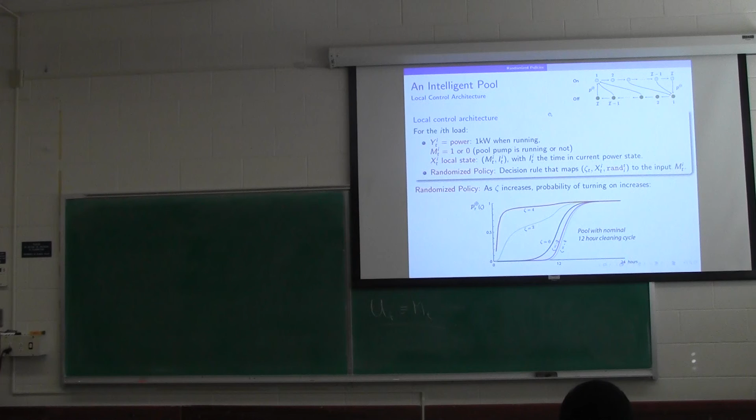I think we're recording now. Oh, we're recording now? Okay. 32 gigs. All right. Thank you. So what did we miss? Not sure. I think we're good.

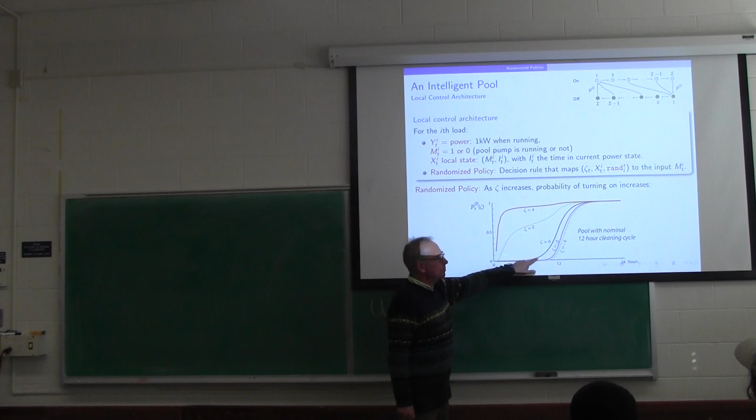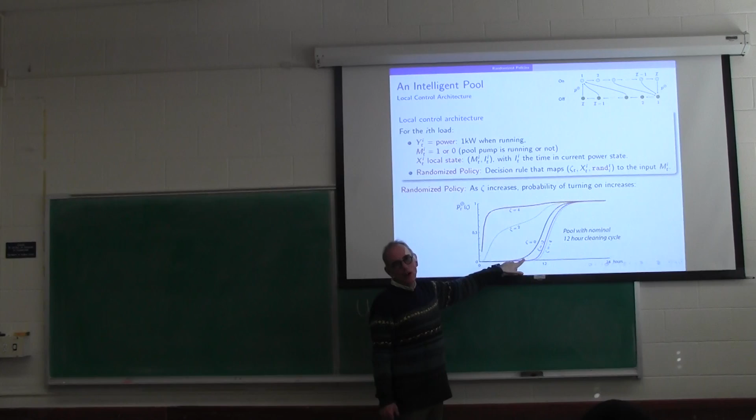Okay, well anyway, I'm sure I was blabbing on about that being a Markov chain. But here's a big step that you can't forget: we're imposing that the nominal behavior is random. Nobody has a random pool. Like I said, it's Markov, but it's deterministic. You've got 8 hours of cleaning, 16 hours idle. In my case, it's 12 hours on, 12 hours off. I'm going to impose randomness.

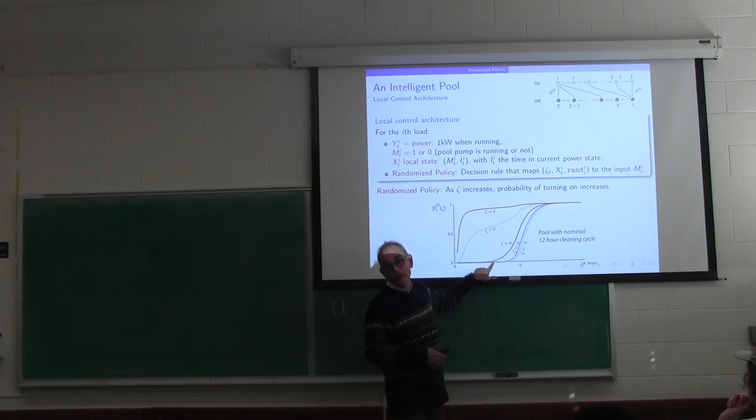So instead of deterministically turning on after 12 hours, after, say, 6 hours, there'll be a small probability of turning on. There'll be a probability of half of turning on at 12 hours, and then a small probability that I'm still off after 18 hours. Now, that's quite a lot of slack. You're allowing anything from 6 hours to 18 hours of cleaning per day. Why not? Who cares?

Do you think anybody cares? This is all to keep algae from growing and stuff. If you have 6 hours one day and 18 hours the next, it's just not going to affect anybody's quality of life. And if it does, then I'll modify it. If some algae specialist tells me that this is too broad, then I'll move it over. Big deal.

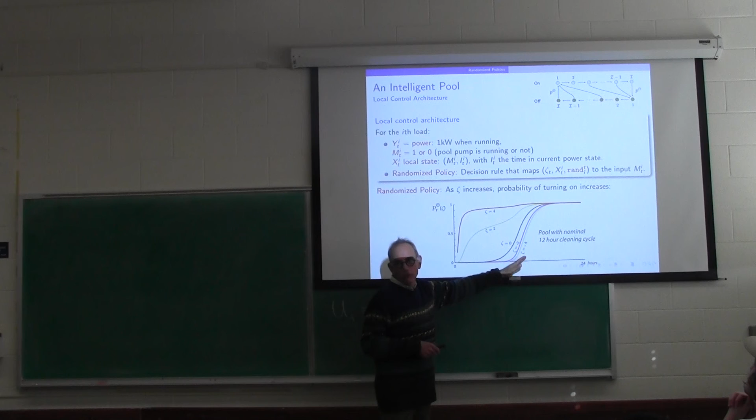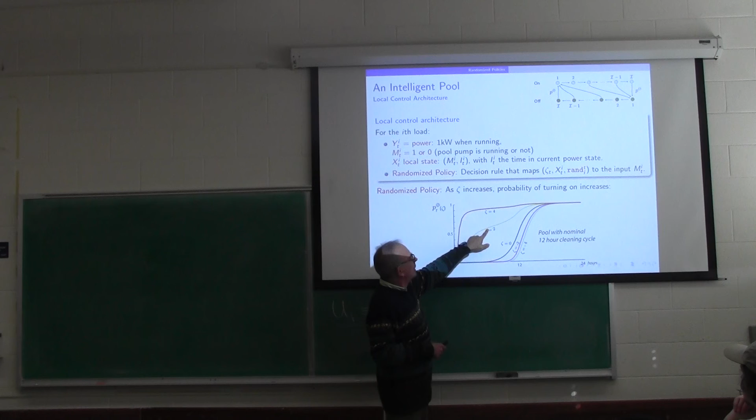So then basically, you construct all these different switching curves depending on the value of zeta, and this is through some optimization algorithm, which I can't describe. This is the output of an optimization experiment. When zeta is 2, you can see this goes way up. There's a higher probability of turning on. And when zeta equals 4, you're basically saying, damn it, turn on. You're screaming. And similarly, it's not as extreme going this way because of the way it works.

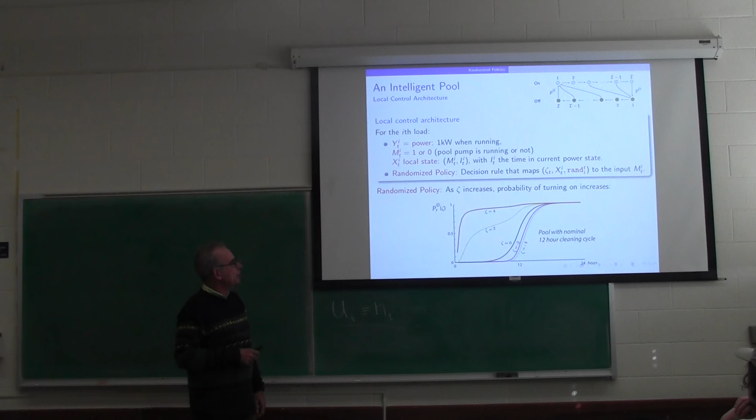So basically, when zeta is big, you're screaming to turn on, and if you're already on, you're screaming, stay on. That's what's going to happen. But again, the precise way you get these curves, I'm not going to explain. All right, so that's just an example of a randomized policy. Clear? Yeah, you could draw these curves. You could just have fun and draw curves. I'm sure it would work well.

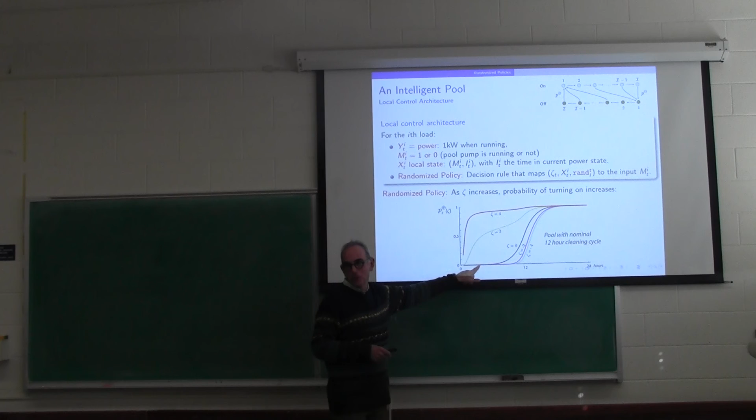And when I presented this at Berkeley years ago, Pravin Varaiya, who's been very closely involved in all this stuff, said that's fake data. And it took me so long to convince him, Praveen, it really isn't fake data. I can show you the code. He just didn't believe it. This is the outcome of an experiment with a very random system. It's just that there's feedback.

You've got 20 pools. And you have 1 over n, or 1 over 20, times the sum of the power consumption of the i-th pool at time t. And you're feeding that back. And then you have a compensator here. Now to get that beautiful tracking, what do you think we use for a compensator?

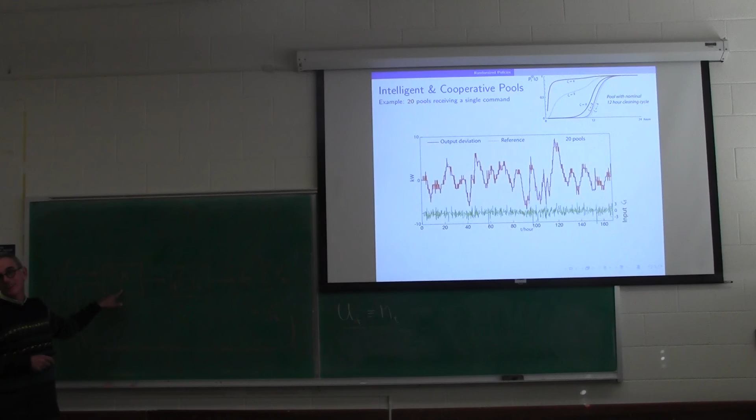So basically, we had our 20 pools, and we measured the average power consumption, which we wanted to track some reference signal, which would also be normalized. The averaging is just because of the mean field model point of view. Really, it's the sum we care about. But who cares about constants? I heard somebody say it. Yeah, integral control, just flat integral control, nothing fancy, and you get beautiful tracking, and it's robust. 20 pools, and you've got 300,000, which is less than half of the pools in Florida.

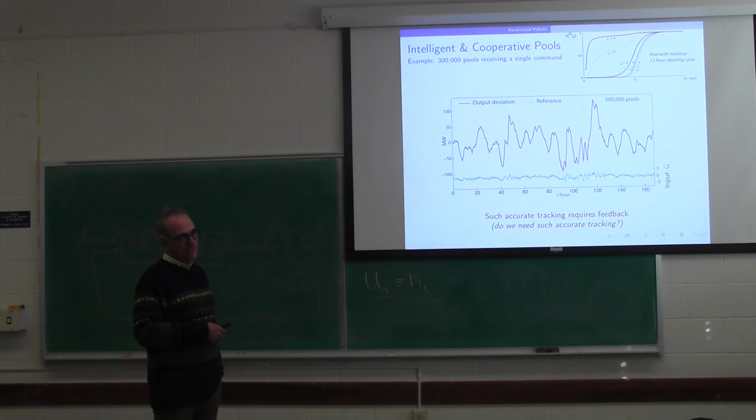It's perfect. It's too good. Nobody gives a shit about perfect tracking like that. I don't think anyone cares. No generator can do that. Batteries can't do that. Nothing can do that but loads. But nobody cares. You don't need such accurate tracking.

It's a miracle, though, isn't it? I couldn't sleep when we saw these plots. So again, you need feedback to get such good tracking, but we don't need such good tracking. So I bet you can break this loop. I bet you can get away with just one way.

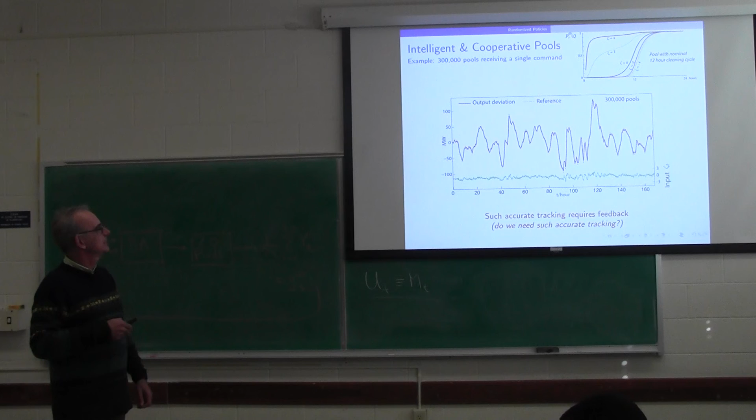So I guess how closely does that model the real pool pumps? Oh, it doesn't. Who cares? No, it doesn't matter. You see, pool pumps, the cleaning cycle of 12 hours or 8 hours is just so arbitrary. I mean, if somebody says I want a minimal number of cleaning hours per week, then you'll impose that. You'll put in another feedback loop, some other thing to make sure you get minimal cleaning.

It's interesting to point out when zeta equals 0, you've still changed the nominal behavior. Yes, and you have to. So if you kept zeta equals 0, if you made it normal like my house is today, everything would fall apart. I couldn't do this design. I couldn't get these beautiful results. I need this family of functions to be smooth, as we'll see today, and the only way to make them smooth is to create randomness in the nominal behavior.

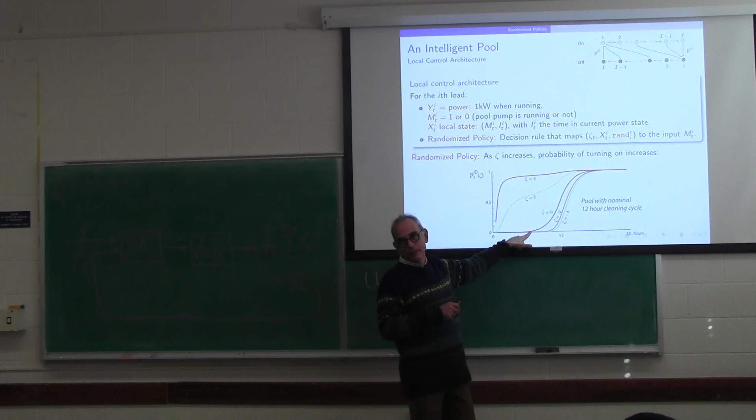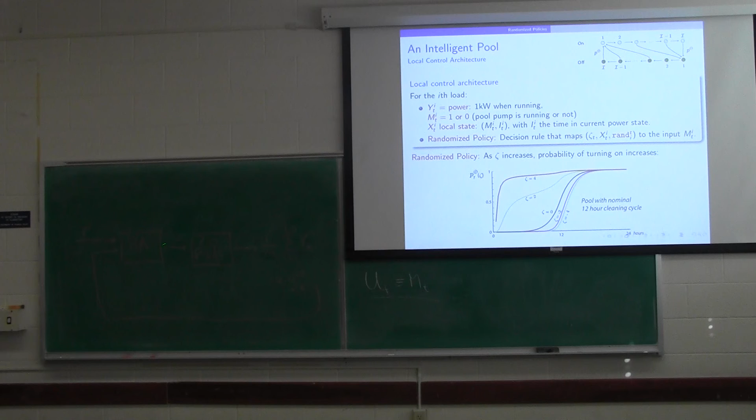I'm having trouble seeing. I get it with the pools as the plant, but what about with the grid as the plant? Are you talking about transmission? What are you looking at? Yeah, so this would be in Juno Beach, Florida, and FPL already knows every pool, and they already have communication with every pool. So they could do a priority stack maybe too, I guess, which is too bad. But they don't.

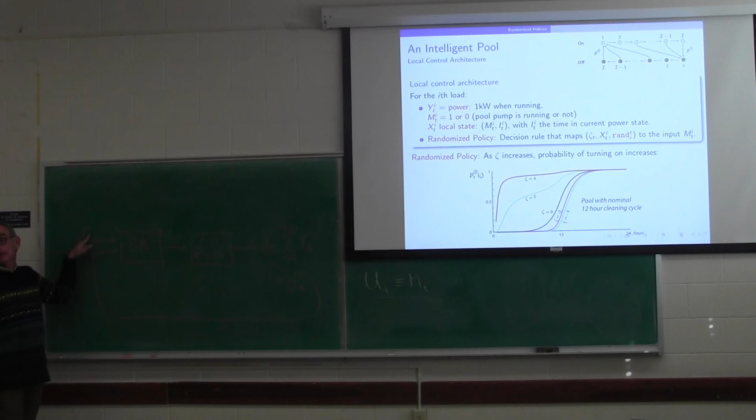They have their own reference signal based on the totality of Florida, based on tie line errors, based on frequency, based on all those things. So they have this R that they'd like to track. And maybe they know what pools can do, so they condition this R. So they're only asking the pools to do some low frequency part of their needs. And they have a PI compensator here, or integral control, and close the loop. I'll make this more concrete as we go.

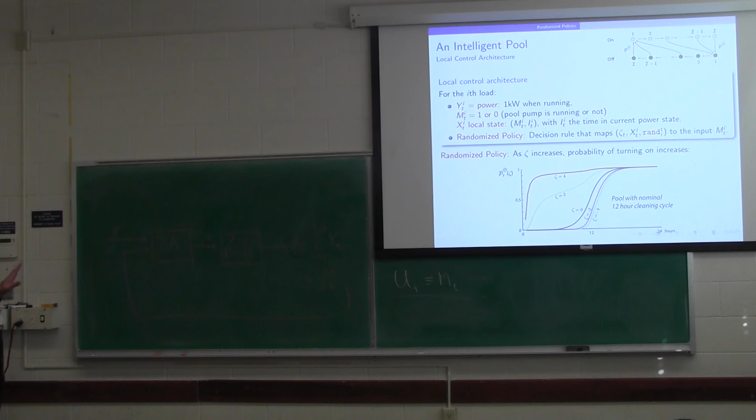All right. Okay, so I'm basically helping you with the homework again here. This is the homework problem you're looking at now. State 1 in this fake water heater means I'm on and consuming power. And I stay on with probability alpha. I'm sampling every minute. And I turn off with probability 1 minus alpha.

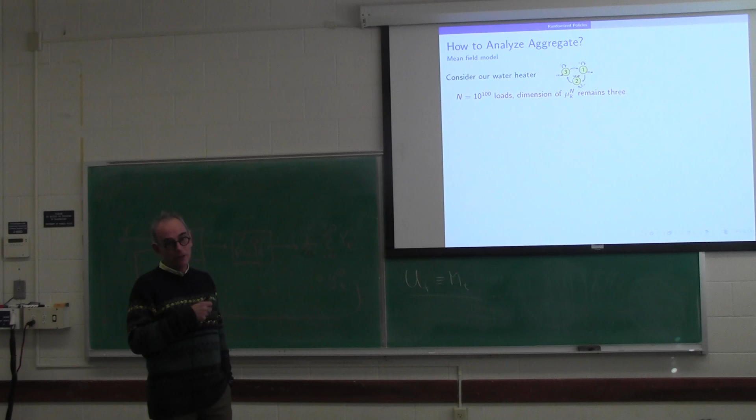Why do I love mean field models so much? Suppose you had 10 to the 100 water heaters, or 10 to the 1 billion or whatever. This mean field model we've been talking about, this histogram, is dimension 3. It's always dimension 3. It doesn't matter how complex, how many loads there are. The thing you care about is always just 3-dimensional. In the pools, it would be like 40-dimensional. Okay, so let me remind you what that is. It's right there.

Okay. So you have all these different states. In this case, only 3 states, so x equals 1, 2, or 3. And that sum is just how many loads are in this state x. So if x equals 1, how many loads are on? And then dividing by n is because it's a histogram, so you're talking about proportions. So basically, if you let n go to infinity, you would get a limit, and it would evolve according to this really simple equation.

That's something you can prove, and I hope it's clear intuitively. You're saying I sum over all possible states i, and look at what is the proportion of mass that's in state i, and how much of that will be transferred to state j. What proportion will be transferred, summed over all i. That's all it is. So let's walk through this slowly for this example.

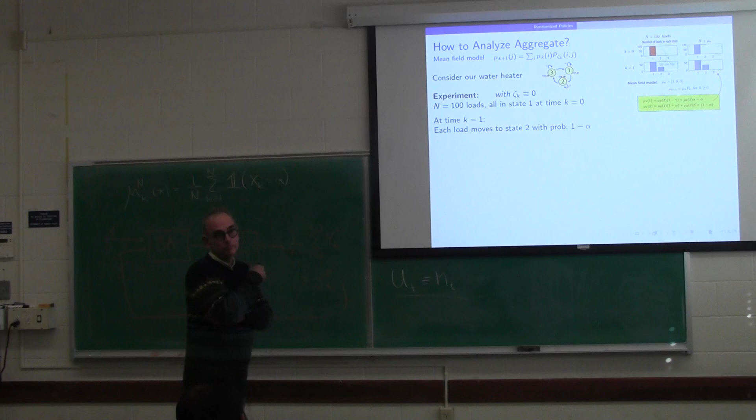Yep. And at the next time step in 2, same thing. I look at how much was in state 1 times the proportion that transferred from state 1 to state 2. That's 1 minus alpha. And then plus the probability of staying still, beta times the stuff that was at state 2. Well, that's 0, so I just get this product. That's 1, so I get 1 minus alpha. Okay.

All right, you can do it again. Tell me when to stop. So you can do the same thing. Now you see this stuff in the third state, and you can do the same sort of algebra, and you'll get basically how much was previously in state 2 times the proportion that went from 2 to 3. All right, and there it is. And you compare this, you go from here to here by doing 100 coin flips. All right? And you can barely see the difference, right? Okay, so I won't keep doing this.

But what happens is the mean field model, oh, this was zeta k equals 0. Just forget about trying to control the system. Just set zeta k equal to 0. You can see it makes it much easier to describe what I'm doing here. Do you notice that the mean field model converges? This is called the steady state, ergodic steady state. So as you look at the mean field model progress, it eventually becomes constant, right?

And if you look at the stochastic model, it doesn't look stochastic, does it? With 100 loads, the mean field model predicts the stochastic behavior perfectly, I mean, as well as you'd ever care. I mean, try to find a control system where the linearization is that accurate. It's a perfect model.

Now, if you zoom in, you'll see it's not perfect. So the probability of being in state 1 is quite small. So the probability of being on for this model is very small. And so you can see, look, it's like 0.01 is the probability of being on. So now I've normalized. Now I've divided by n. N's 100. And you can see there's like a 100% error on that.

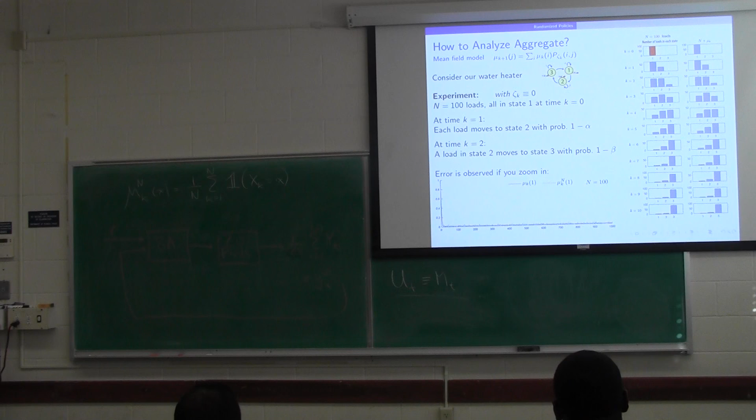Oh no, here. I mean, if this is the way water heaters really worked, this would be the fluctuation of power consumption as a function of time. Which doesn't need to be fixed any more than that? We're allowing for so much. It's okay that the power is not quite. Yeah, absolutely. Because all those pool pump examples, these beautiful plots here, 20 pools, you can imagine how noisy that was. But as soon as you close the loop, it's all gone.

Okay. So the mu Kn, that's from the plot? Here, this one. Yeah, so the blue is telling us the proportion of water heaters that are in state 1 at every time step. What about the red? I should have put the K there, sorry about that. The red is the mean field model. I set zeta K equal to 0. So whenever you don't see an N, that means the mean field model, which is just taking products of matrices. Think of mu as a row vector. The new row vector is just the old row vector times this matrix.

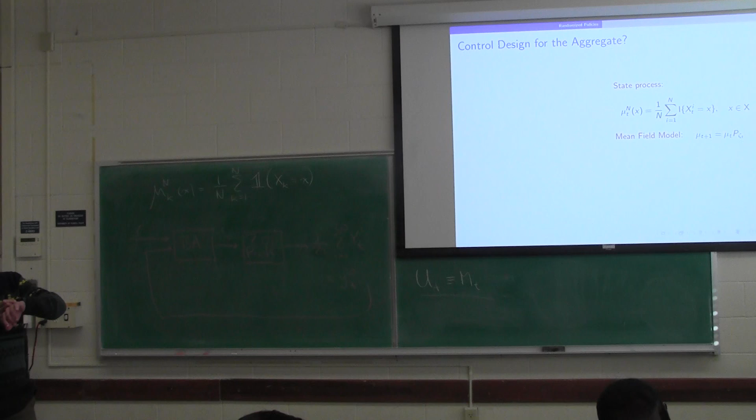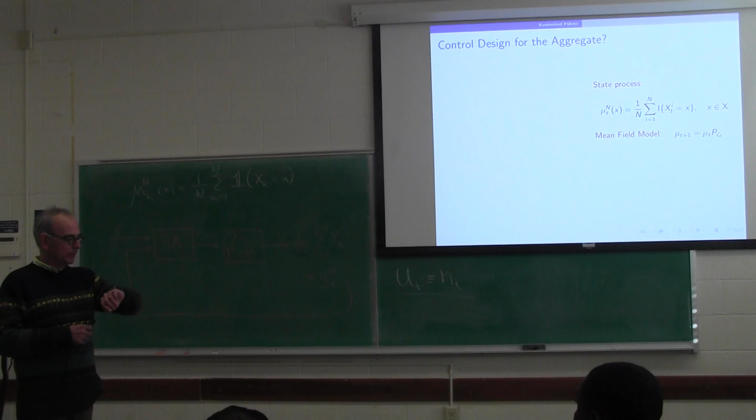So now I want to get to control design. So you definitely have to wake up. But I mean for the aggregate, okay? Because like I said, how to design P zeta is a bit outside of the scope of the course. I'll say a few things, but not much. But okay, we've got this, what I'm calling the state process, all right? And that's approximated by this mean field model.

And then what we care about is the average power consumption. So U of X is the power consumption when I'm in state X, okay? And that's the thing that the balancing authority really cares about. So the balancing authority would like to be able to choose the zeta t here to make y of t go up and down like I've showed you. Okay, so it's a nonlinear state space model. The model here is linear in the state. I'm thinking of mu as the state.

So like in that silly example, the fake water heater, it's 3-dimensional because it's 3 entries, okay? And so I've got a matrix vector product there. That's a linear operation, so it's linear. But naturally, it's nonlinear in zeta. It has to be. It's impossible to make it linear in zeta. If you think about it a bit, this is positive, this is bounded by 1, this is all sorts of things. There's so many constraints, it has to be nonlinear.

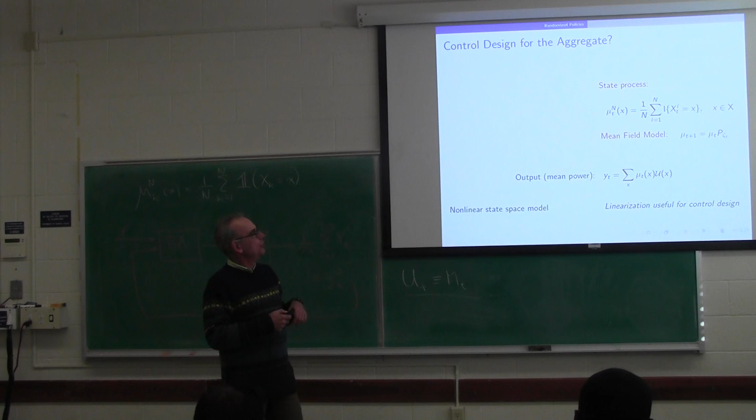So linearization is the trick, and so this course is really great because I'm forcing you to review everything you should have learned in an undergraduate control course. And the very first thing they should have taught you by week 2 is that no system is linear, and you end up linearizing it before you start. And it just turns out that these models are really easy to linearize.

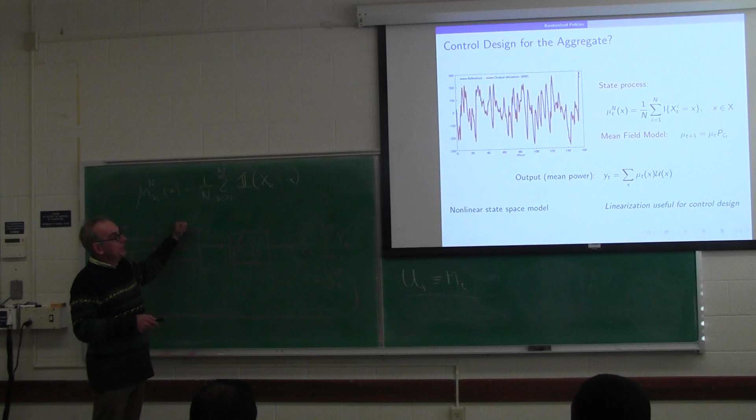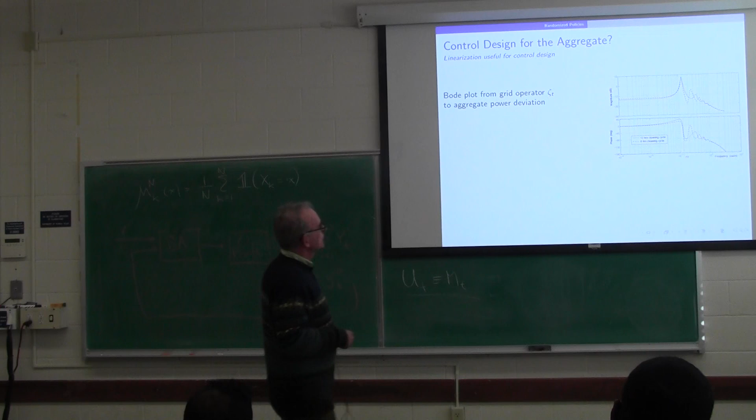Okay. So how we got this beautiful tracking was to actually look at a linearization of the mean field model and then design the PI control based on the linearization. So we're able to choose our crossover frequency, all that stuff based on the linearization. All right. Okay, so this is 2 examples of this design that I talked about. Is that too small now? So basically, there's 2 Bode plots here.

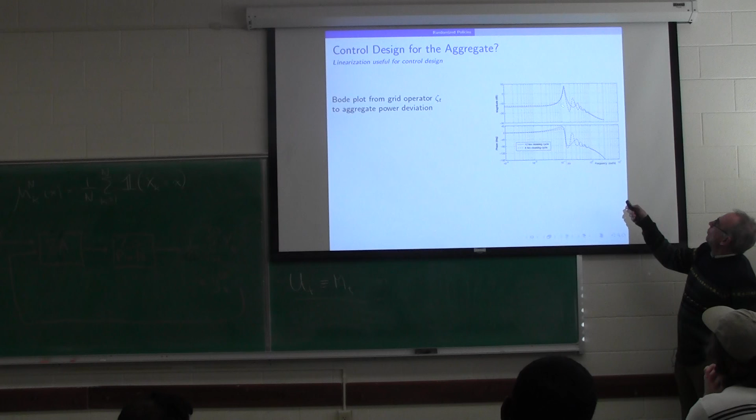One of them is based on my pool, which has a 12-hour cleaning cycle. And the red one is based on Bob Moy's pool, which has an 8-hour cleaning cycle, but randomized. So we basically put a window around the nominal behavior and put in that randomization. And I haven't defined a linearization yet. I'm just showing you what we will get. You're going to get basically a flat response and this massive resonance, and then it's going to decay off. And I put a question mark there.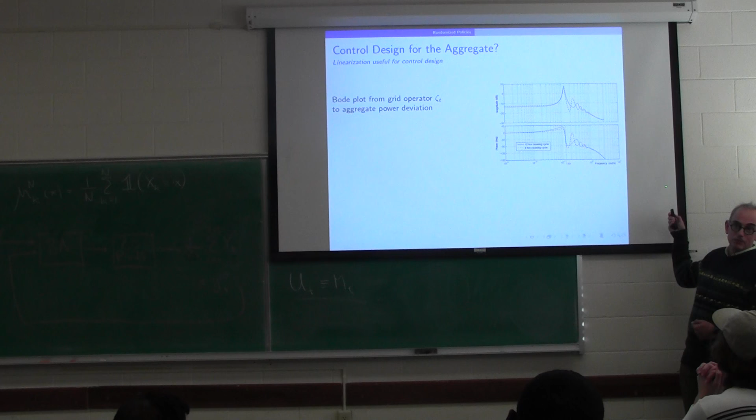Why do you always get a resonance? And why is the resonance the same whether it's an 8-hour cleaning cycle or 12? Now, by cleaning cycle, I mean 8 hours on and then 16 hours off. So 8 hours on, 16 hours off. Standard pools go on at 10 a.m. and they turn off at 6 p.m. or something like that. There's a clock like that. Anybody have a guess what that is? Think about it. All right.

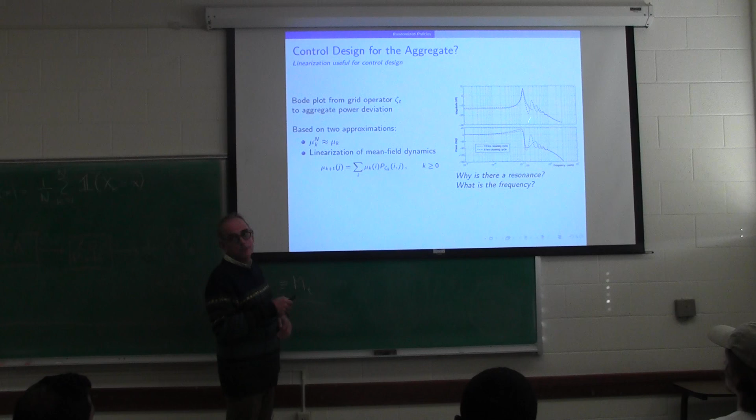So the way we get this Bode plot, we get a linear model of the system, is, first of all, this is a thing that I've been pushing today, that this guy here is really accurately approximated by the mean field model if you've got 100 loads, say. But then I want to linearize this nonlinear system, which means even though this is a nonlinear function of zeta, I'm going to approximate it by a linear function of zeta. And that's what's done in control all the time. All right? Okay, so anybody have an answer to this? Besides you, or some of you know the answer.

Sort of delay. Well, take a look at this again. Remember, I'm on for a while, and then I turn off for a while. And then I'm on for a while, and I turn off for a while. So think about the normal pool. I'm on for 12 hours, off for 12 hours, on for 12 hours, off for 12 hours. It's completely periodic. So what's the question mark?

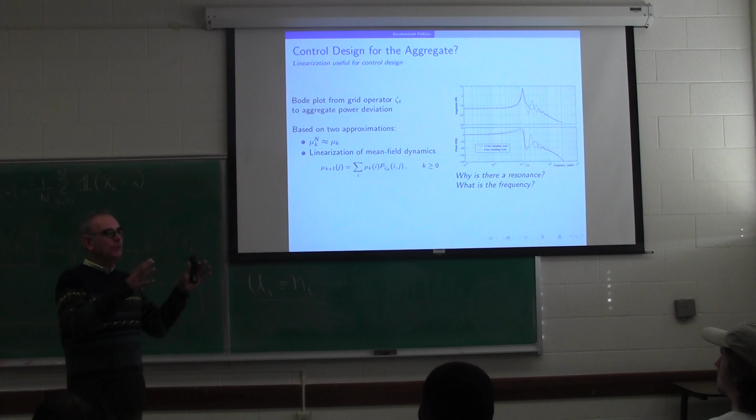The sum of the delays? Yeah, no, so the nominal behavior is periodic. Yeah, it's a period. So that peak there is exactly 24 hours, because the normal behavior is approximately periodic with a period of 24 hours. If you watch those histograms evolve, eventually it'd converge, but you'd see some oscillatory behavior for quite a while, and eventually settle down. So the linearization is going to have complex eigenvalues.

Okay. Because I can't do this. We're talking about math now.

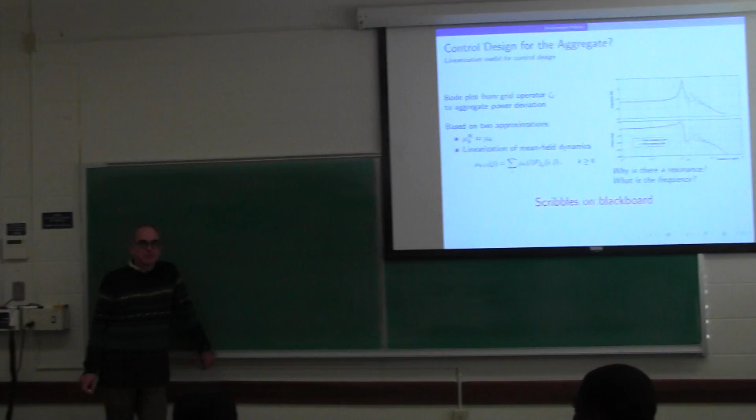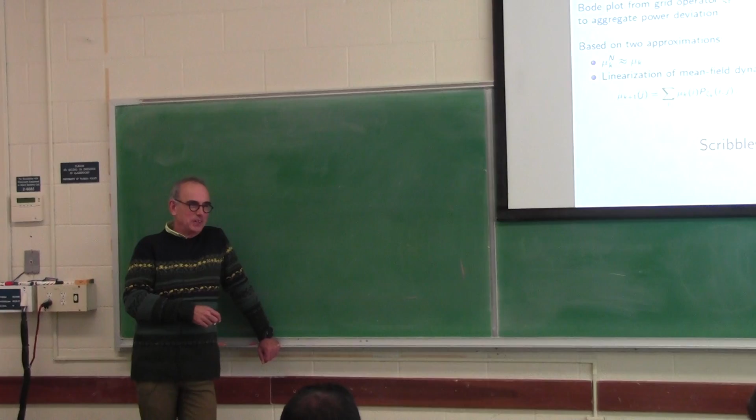Okay. So how many of you have seen a small signal analysis before? You have. Like linearization, like how you take a nonlinear system and linearize it. No? Boy, your control professors let you down. They hide it under different names. Oh yeah, so what else would they call it? But I mean, you must have seen a nonlinear system, and you still can design a control system. Building an amplifier and... Yeah, small signal models for amplifiers. Yeah, okay. So anyway,

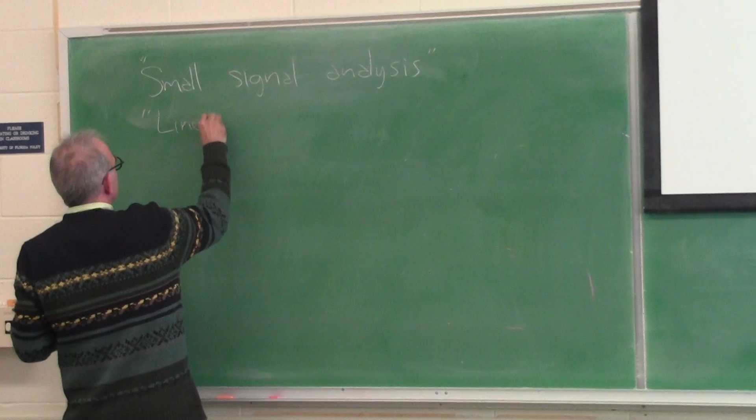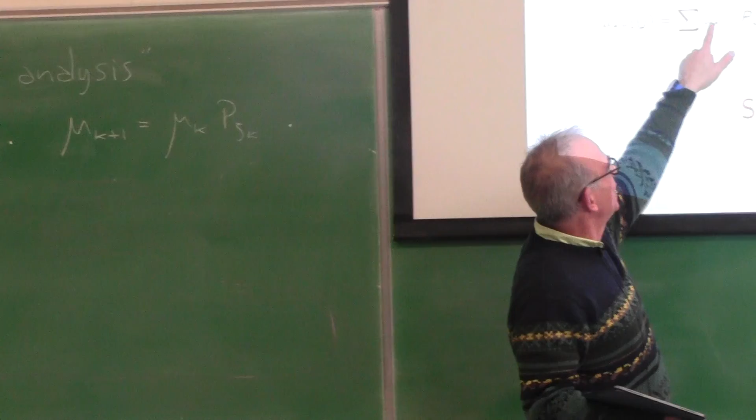okay, so basically we have this equation here. And again, you're all with me, right? That is vector matrix multiplication if mu is considered a row vector. This is basic algebra. We definitely had a matrix prerequisite for this course. If you want to multiply a row vector times a matrix, you multiply on the left, and you take a sum. So I can use this shorthand if everything's a row vector. And what I want to do is approximate by a linear system, but you always look at deviations. Okay, so I'm going to make a bunch of assumptions.

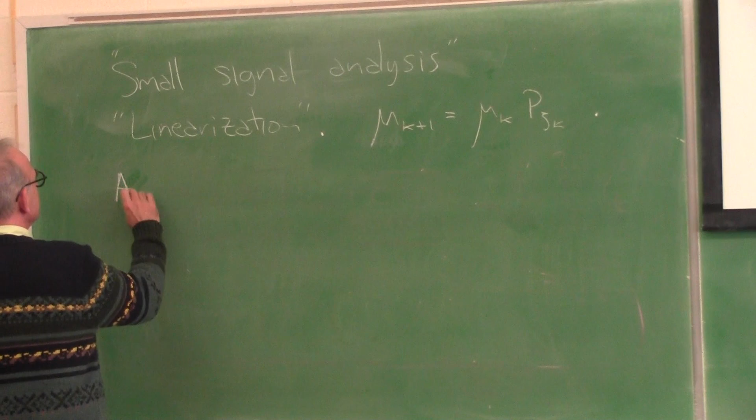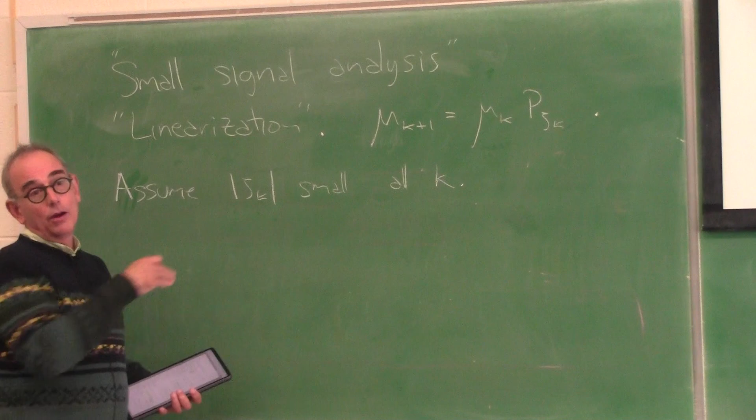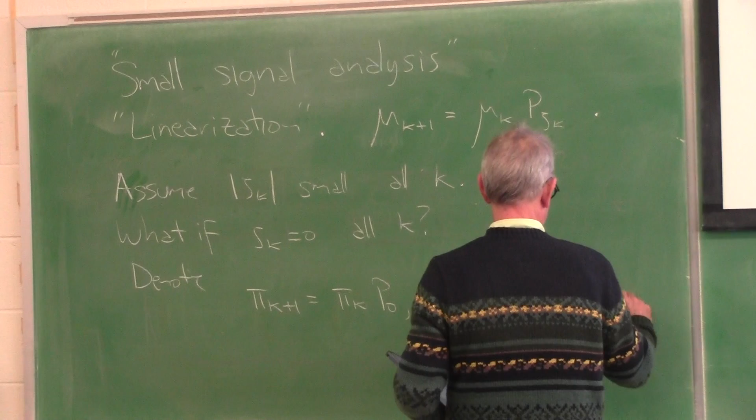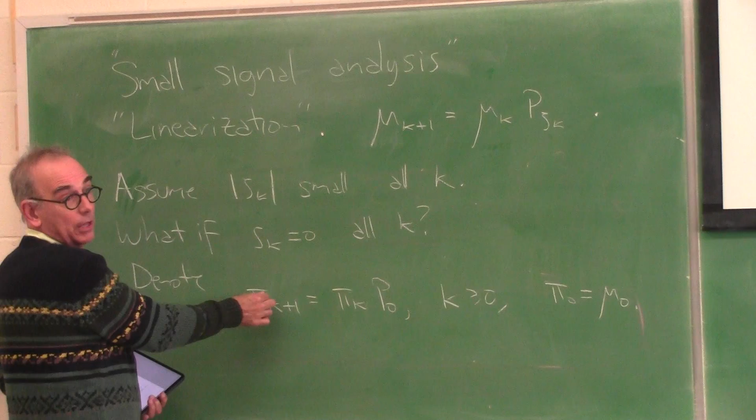So when I talk about small signal analysis, and whenever you talk about linearization, you're either assuming the input's small or the difference between that input and some nominal input is small. And in particular, what happens if it's 0? If zeta k is 0, I'm going to give it a different name. So what I'm going to do is look at the deviation between these two guys: what happens when no input is applied compared to what happens when an input is applied. But I'm going to need another assumption. I'm going to assume that these converge.

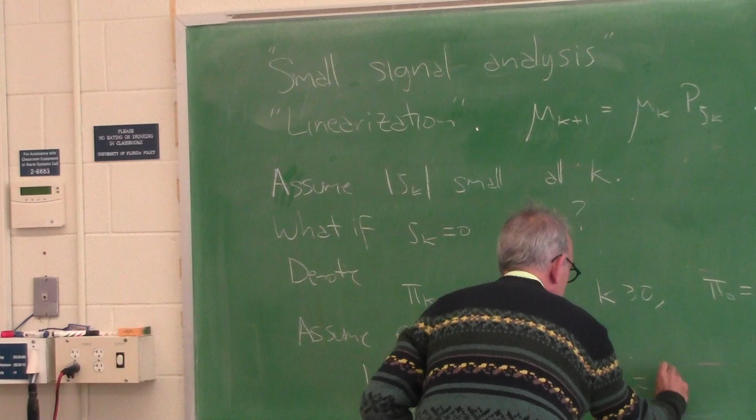So that really helps. So it's really a mild assumption. Markov chains are ergodic under minimal assumptions. It's always true, so that's not really an assumption, and we're going to design it that way, and we're going to design the nominal behavior. Okay, so then what we're going to do is look at the difference. And I guess I have to turn this off. Bummer.

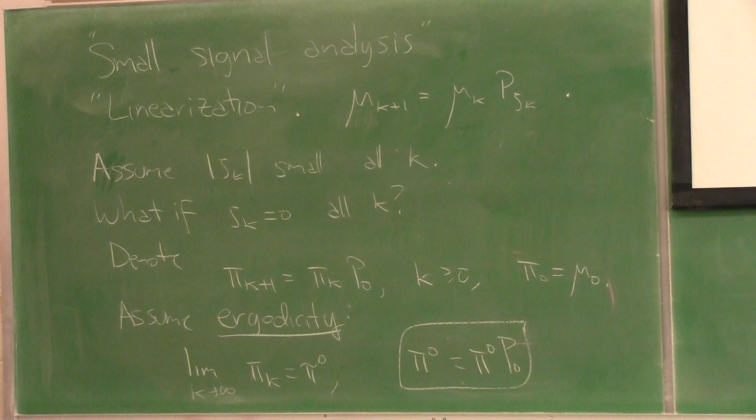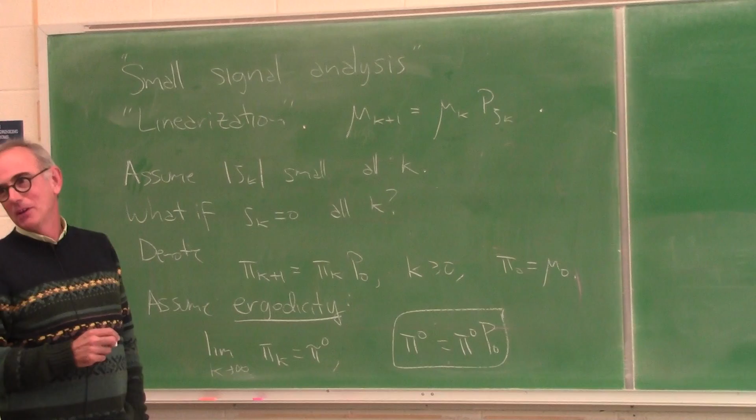And there's so many ways to define this. In my notes that I'm going to share with you, I looked at the difference between these two guys, and now I kind of regret that, but it doesn't make any difference. Let's just do it. I've read many papers on this, and you can see both definitions used. You can either take mu k minus its nominal behavior at 0, just steady state, or you can subtract out the control-free behavior, which is time varying here. Either one, you'll get the same model, so it doesn't matter.

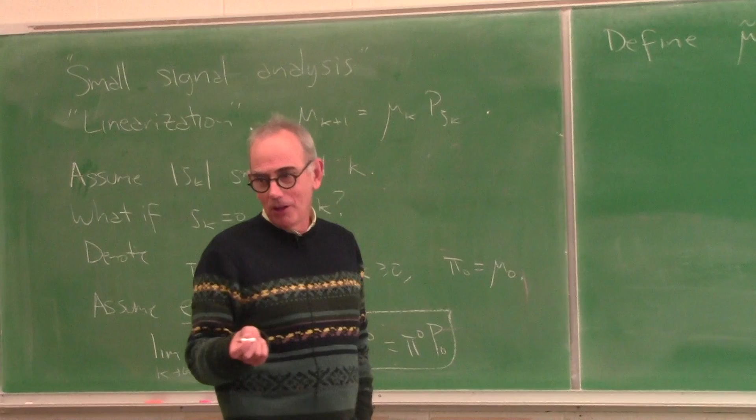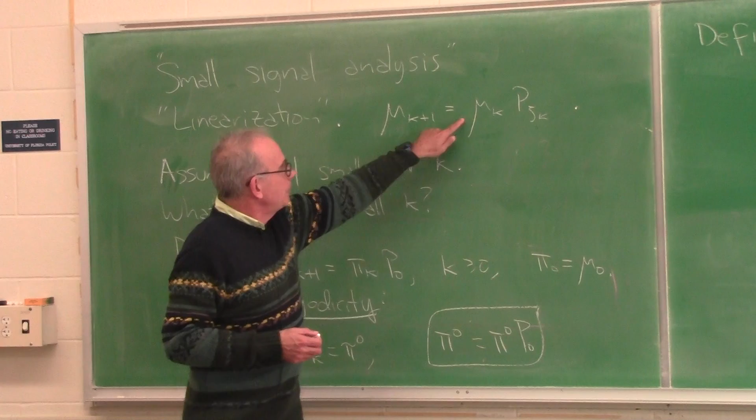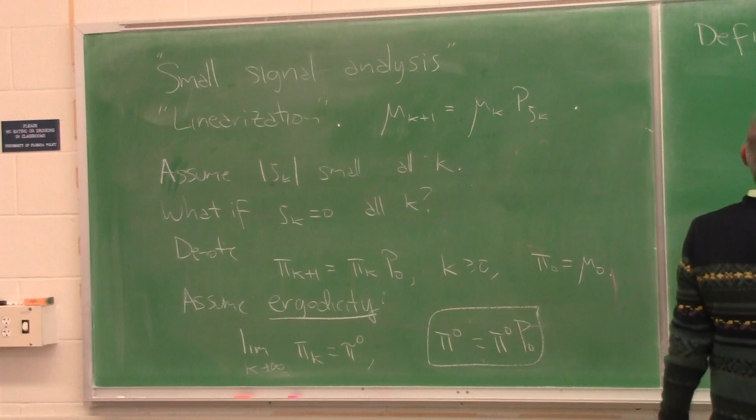And I'm going to assume it's small. What more do I have to assume to make sure that's small? I'm assuming this is small, so that evolution equation and that evolution equation are almost the same. But you need one more thing. P is not changing too much. Well, not P really, but I don't want this changing too much. I'm going to assume that mu 0 is close to the steady state. And that's why it really doesn't matter if you look at the deviation from pi 0 or from pi k. All right? But let's stick to that.

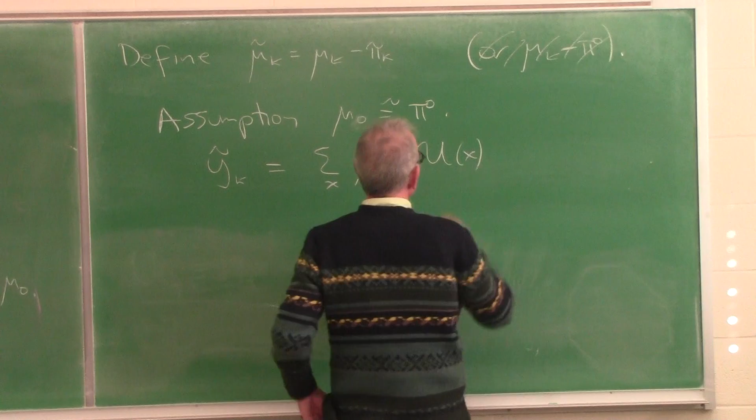Okay, so what are you going to do then? I need an evolution equation for the deviation, and that's what I'm going to get a linear model for. So remember, U of x was the power consumption when